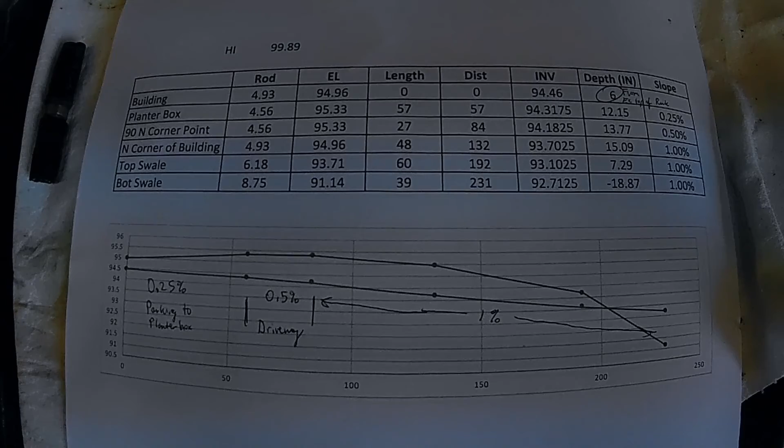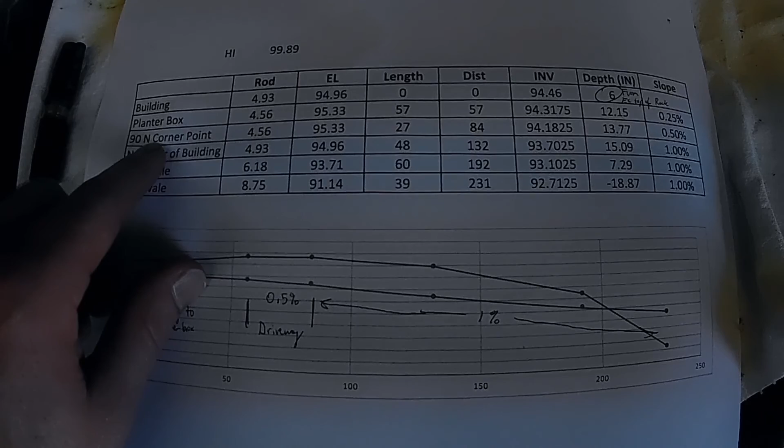So here's the sheet I got made up. I'm a civil engineer, so maybe I get a little carried away with this stuff, but these are all the elevations I shot of the different locations. So that's the building right here in the corner, the planter box that's low. That's the corner point that I'm going to turn where that 90 is going to go.

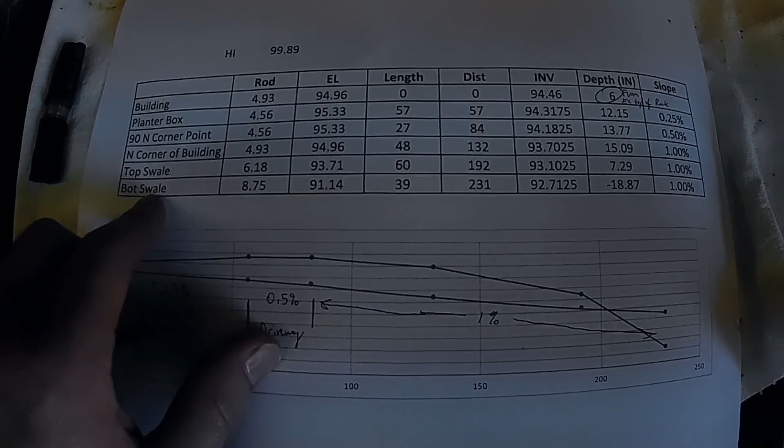This is about halfway down that line headed towards the back. That's the top of the swale in the back, and that's the bottom of the swale in the back. So I shot these elevations just based off an arbitrary instrument height there. And then this is the length of each run.

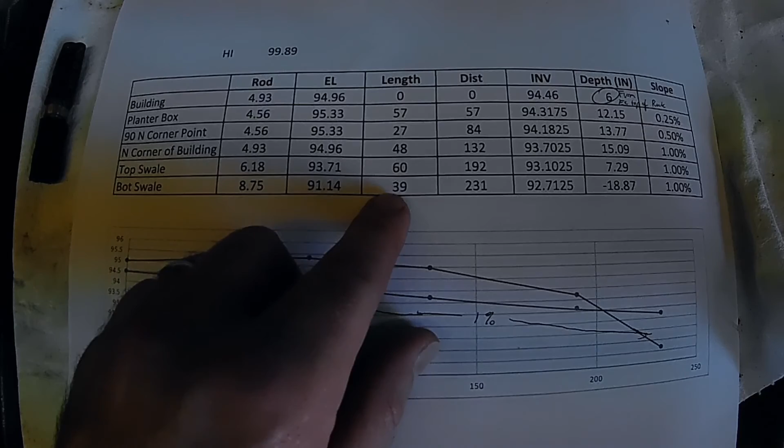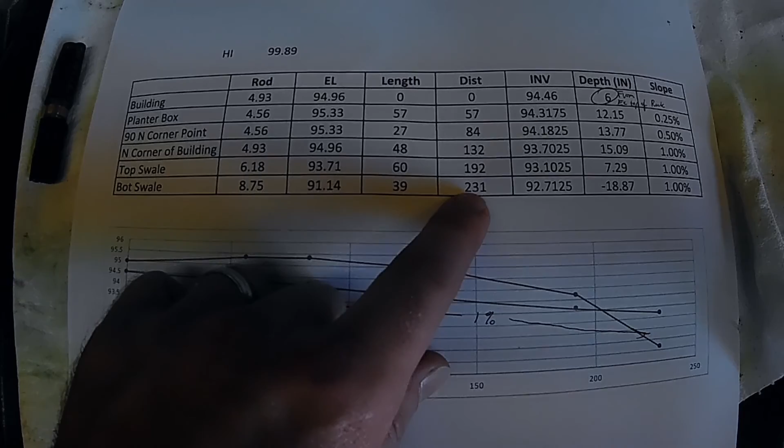In between the building and the planter box is 57 feet. Between, to go across the driveway from the planter box to where that 90 is going to be is 27 feet. So I've got each of those measured out here. My overall distance is about 231 feet, but I don't actually think I'll have to go that far. I'll show you here in a second. And then this here is my invert.

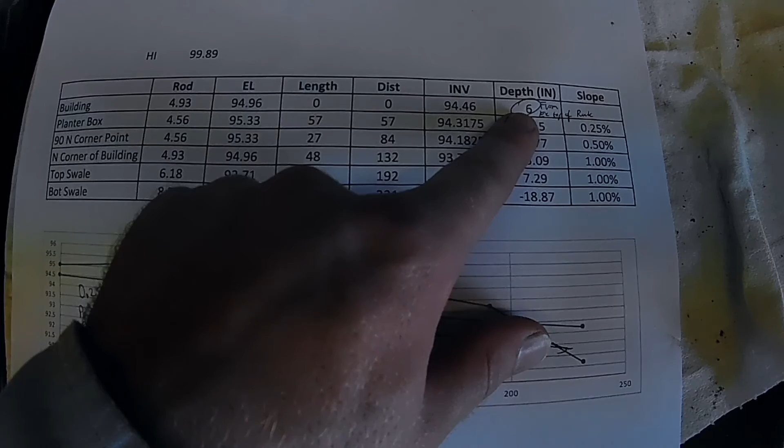On this first one, I want to stay really high, because the lower I go here, the deeper my entire line is going to be throughout the entire system. So I've got only 6 inches depth to the invert of the pipe, and the invert of the pipe is the bottom flow line, or where the bottom of the pipe is, or where the water runs.

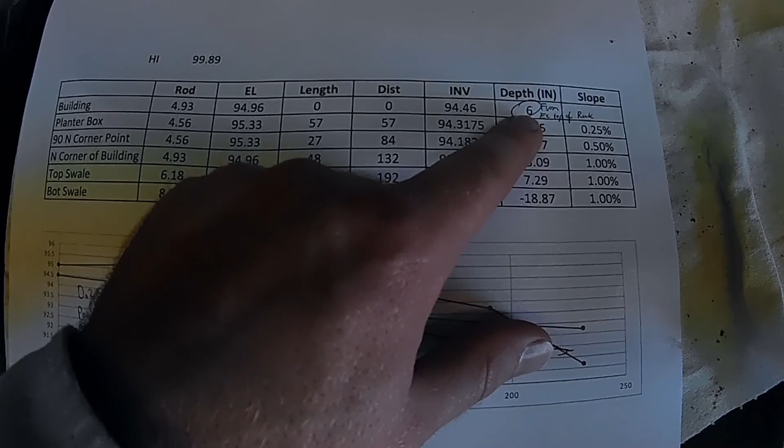Two reasons I'm doing that. One, like I said, the entire system will be deeper for every inch that gets deeper. And two, I've got the electric coming to this building, the first building, that I'm going to be watching out for, so I just want to stay up in the air and out of that.

So this one here, I just put a depth in. Now the next one is I put a slope, and I only put a 0.25% slope on this, and that's going to make the invert at the planter box 94.31, which is just below the 94.46.

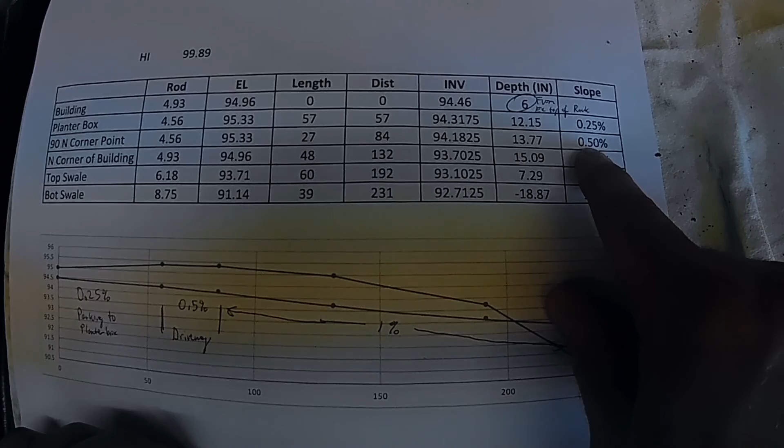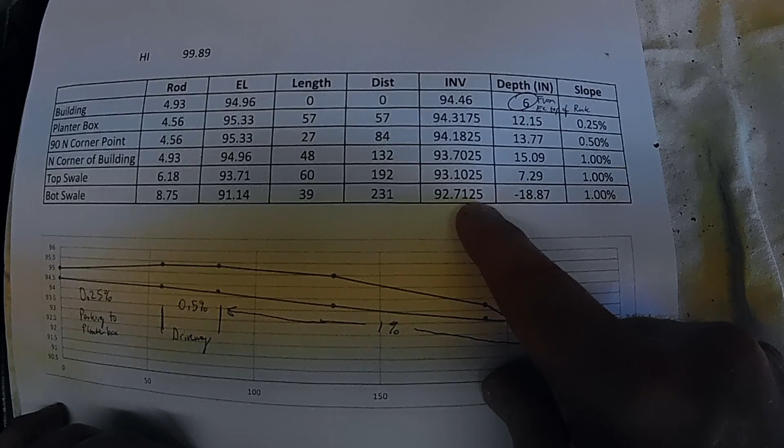Then from the planter box over to across the driveway, I'm doing a 0.5% slope, and that'll make that invert over there at the 90-degree corner 94.18. And then from there all the way out to the back, I'm doing a 1% slope, that whole back line. I'll show you why I've got those different percentages here.

These two are a little low. It's nice to have 1% everywhere, but again, that just gets you deeper further on. And this being a French drain type system, it's not a high flow. It's just infiltration through the ground until I get the downspout in it in that catch basin.

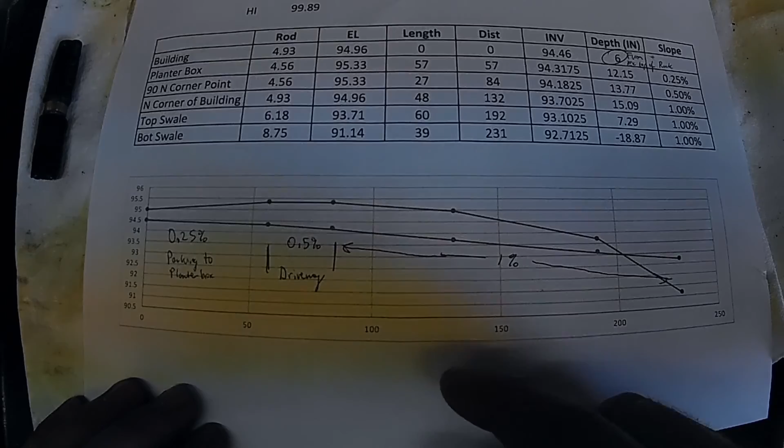So this over here shows this top line is the existing ground level at each of these spots. So the first one here, again, by the building, by the planter box, across the driveway, about halfway down the long run, back corner of the building, and bottom of the swale.

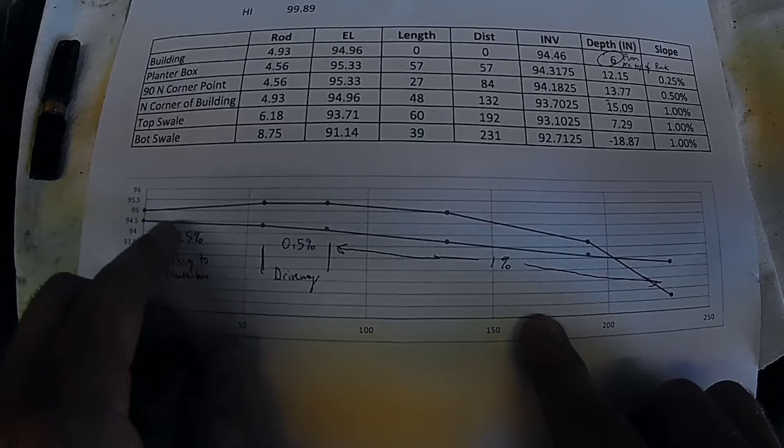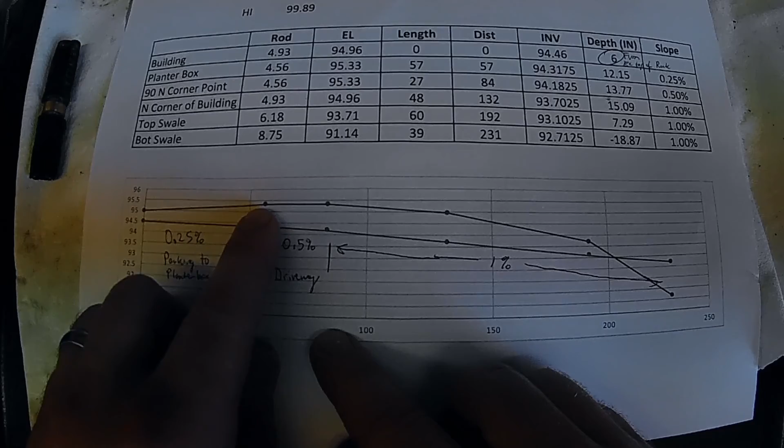You can see here actually that the elevation by the corner of the building, the first spot, is lower than the 2 spots I've got by the planter box and across the driveway. So the ground level is higher. That means the water that hits this surface, the rainwater, is going to flow towards that building.

That stinks. So that's why I'm going to put this catch basin over here. This bottom line is the invert of the pipe then. So I've got it being 6 inches deeper than existing grade, and then I'm going at this 0.25% slope to the planter box, and then this is across the driveway. I'm doing a 0.5% slope, and then this is the whole line going out the back at 1%.

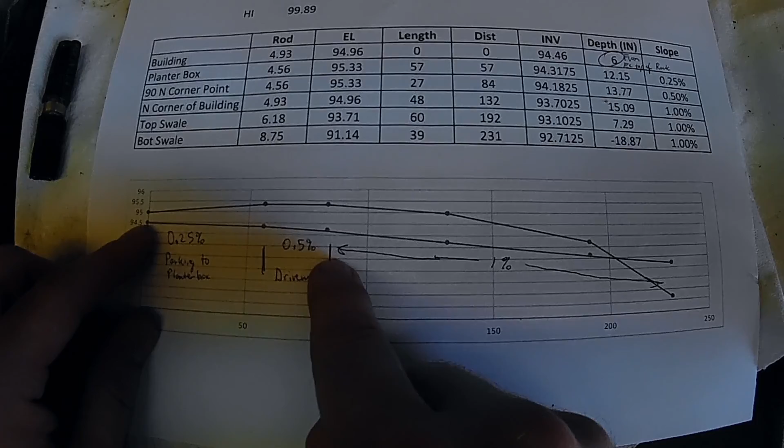And you can see here that if I made this 1%, then this dot would be deeper. Then if this was 1%, then this dot would also be deeper from that, compounding onto this, and then that would make this dot way down here really deep. So just due to the existing ground level and the fact that we're lower where we're starting versus where we're going to, that's not good.

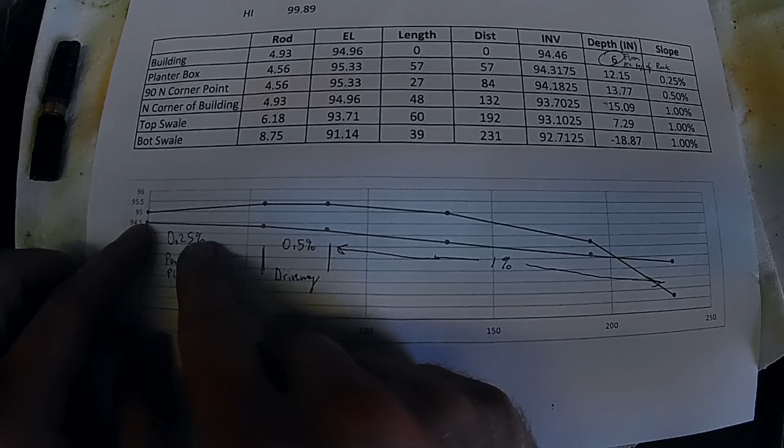That's why I'm running this lesser amount of slope, because it'd be nice if this ground level here was higher up, if up by the building was higher, then I could have good cover throughout this whole pipe, but I don't.

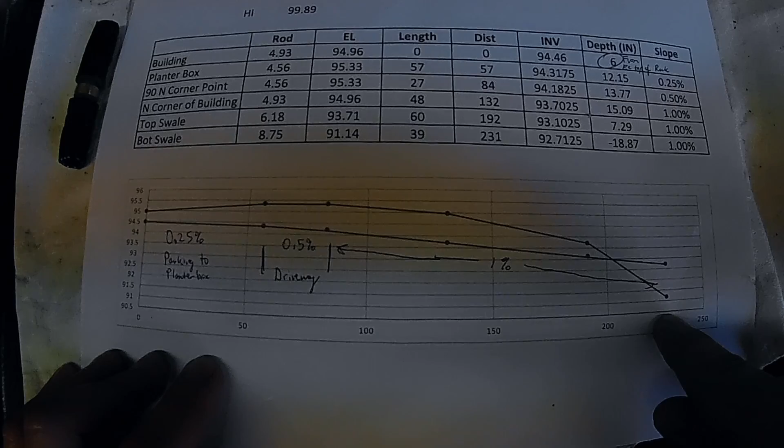So you can see, if I run that 1% slope, this bottom line comes out and daylights out of the existing grade before the entire 231 feet. 231, that's 200, that's 250, so that's 231 right there, but I daylight out about 205. So that's why I said I probably won't do this whole 231 feet. I'll probably end up a little bit short because I'm going to daylight out in that ditch.

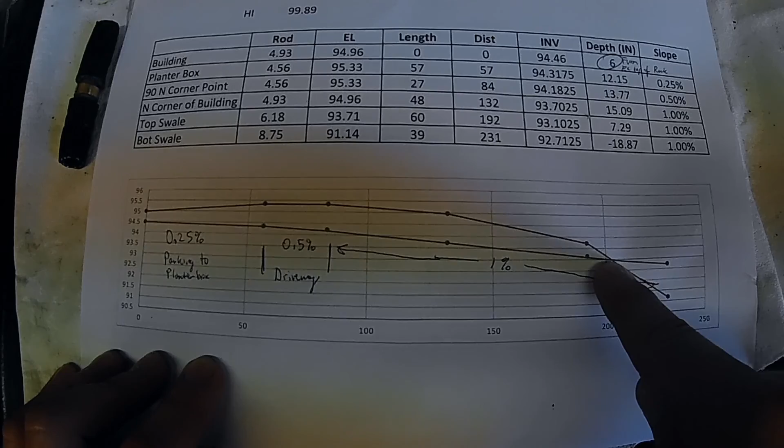So that's an overview on the paperwork, and I guess we'll go get started.

Alright, so this is where we're going to start our French drain with our first catch basin here at the low spot at the corner of the building. So I've got my laser set up. It's set up at the negative 0.25% slope, which is going to make it slope down as we go towards the planter box. And the first thing I'm going to do is, this rock here is about my existing grade.

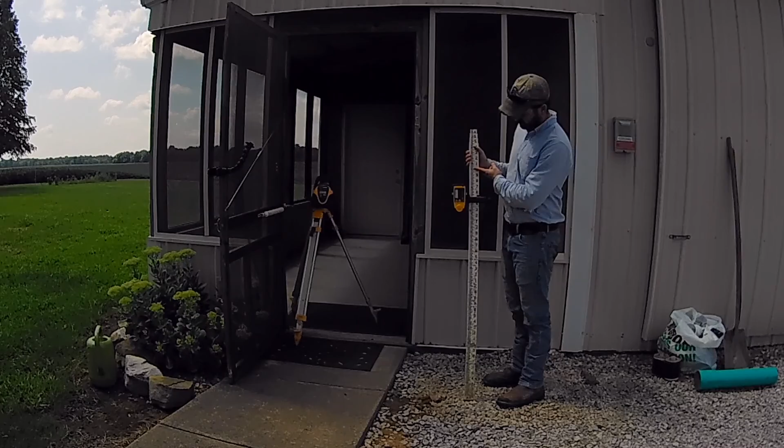So I go ahead and I got this set for this existing grade here. Now, I said I was going to be 6 inches lower than this. So what I do is I raise this up 6 inches. And what that's going to do then is make my bottom of my hole be 6 inches deeper than this rock right here.

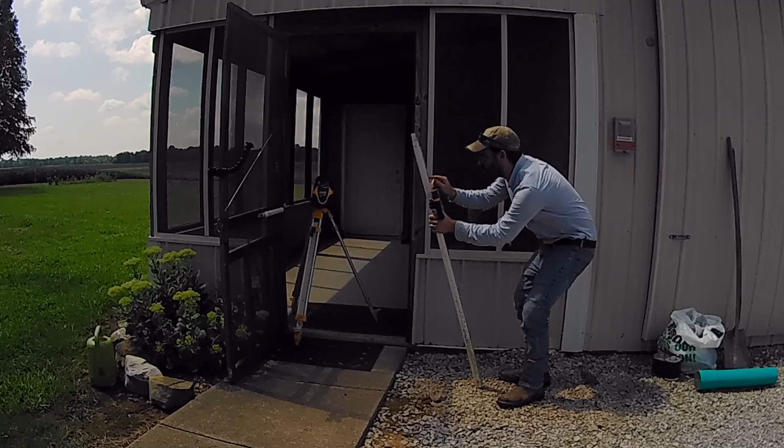Alright, so I just raised it up 6 inches. So now again, if I slant this down, I can pick up the reading. So when this is plumb, I'll be 6 inches deeper than here, and that'll get me started for my trench, and I'll keep digging back at that slope, back until I hit the planter box.

So I'm going to scrape back some gravel and whatnot, and the reason I did this first is because I'm going to scrape this gravel back to save it, and then obviously put it back. So I don't want to lose this grade I had. I probably could have used this sidewalk here and matched that, but being a little lower would probably be a little better.